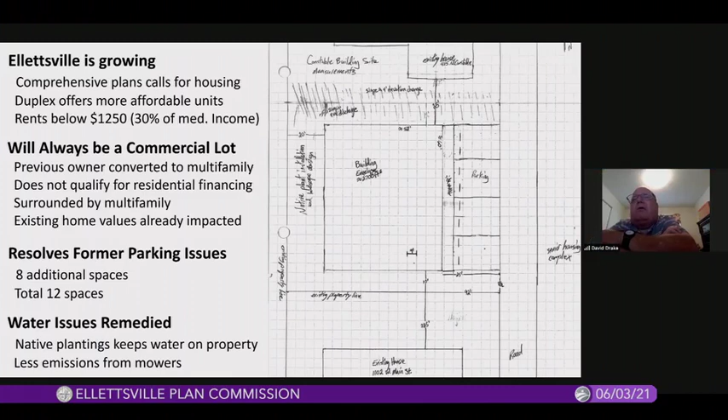Kevin, do we know? I don't have a question, but I went up there and looked at the area, and I gotta say, I know what's happening, but I do not like the mixture. There were single families living in homes mixed with what's wanting to be done here, and a mixture of older people living in there. It's just like a big mixed up community, and I just think it looks congested.

That's a fair point. I anticipate that as Ellettsville grows, those empty lots north of Constable on Grant, where it dead ends and there's 2 or 3 single family houses, I suspect, though I don't have the means to confirm this currently, those 5 acres north of Constable and even those single family homes will ultimately turn into multifamily, since that's what it's zoned for. And we know the population in Ellettsville continues to grow.

That doesn't address the immediate concern for sure, and I see what you're saying. Yeah, I mean, I see that. Honestly, I don't think that one duplex on a vacant lot is really going to affect things much one way or the other at this point.

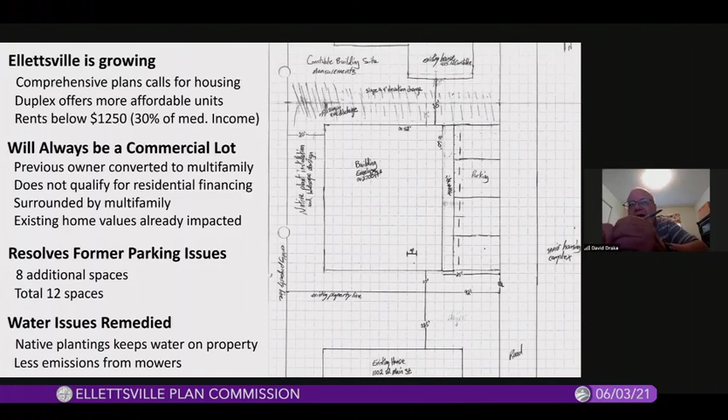Just my opinion. Kevin, do we know who's trying to get in? I don't know, and I don't see anyone trying to get in right now. Okay, I just wanted to make sure it wasn't someone who wanted to address this petition. But if they're not currently trying to get in, then there's not much we can do about it right at the moment.

So any other questions from the Plan Commission? Yeah, I've got a question, Terry Baker. Is R3 the only way we can go on this, or would R2 multifamily work for a duplex? Because R3 opens up so many doors.

No, it would have to be R3, because otherwise we get into splitting the lot, and if we do that, it's not going to meet the minimum lot size we have now. So then it would end up going through the Board of Zoning Appeals, which isn't... I mean, it was either this or going through the Board of Zoning Appeals. Plus, it brings the rest of that property into compliance. I mean, it's legal non-conforming, so it's not an issue, but going forward it would make it a little cleaner.

Thank you. I drove up there too. I've driven by it multiple times, and it's a one-way street, so it's pretty narrow. The lot, when you just look at it empty, looks so small and so close. I would really like to see a single family rental go in there rather than a duplex, but that's me.

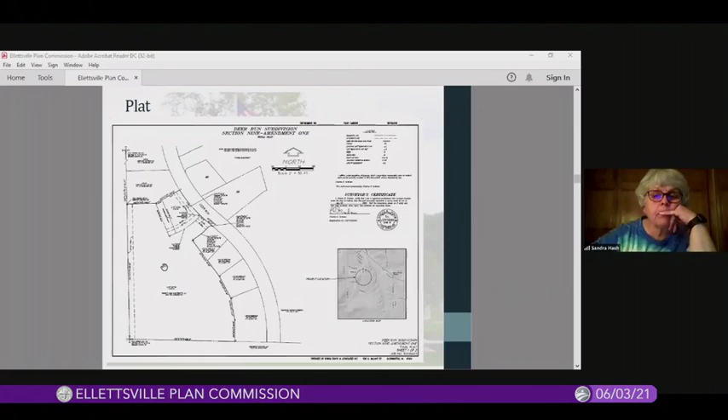Is that where they took all the trees out, Kevin? Probably, yeah, I'm pretty sure they took a bunch of stuff out. Whoever buys that home better have something with their driveway, because my Lord, they're so steep. It's unbelievable.

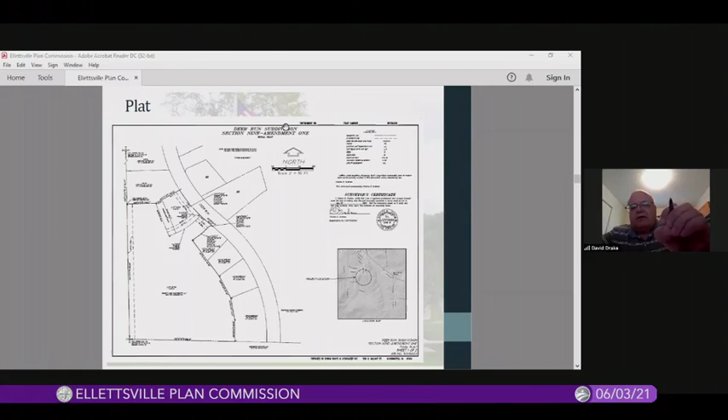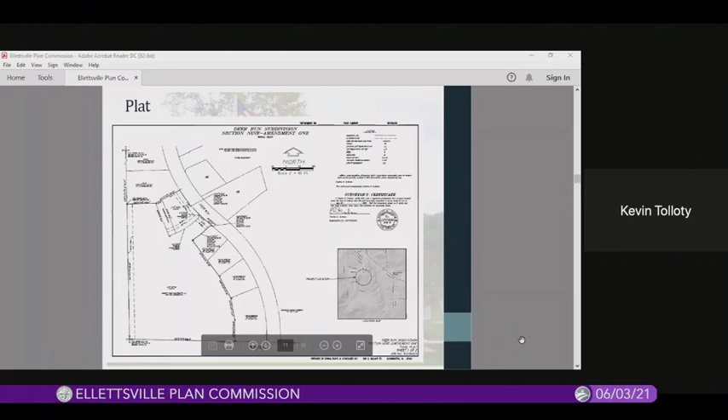Okay, did anyone from the Plan Commission have any questions or comments for Kevin? Kevin, is there anyone from the public showing up? Looking, I don't see any hands raised on the Zoom feature. I can only see 4 people at a time with my screen, so I do not believe there's anyone. Well, if there is anyone, unmute yourself and say hi quickly. Okay, I don't hear anybody.

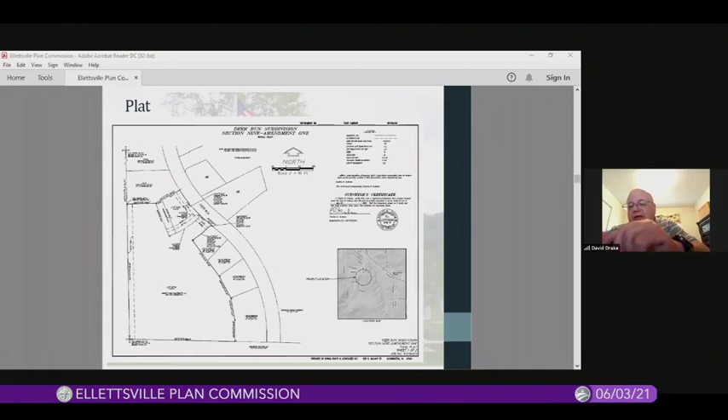So would someone like to make a motion? Boy, nobody's in a motion mood tonight, are they? So I will make a motion that we approve the final plat amendment for PC 21-15 in Deer Run. I'll second that.

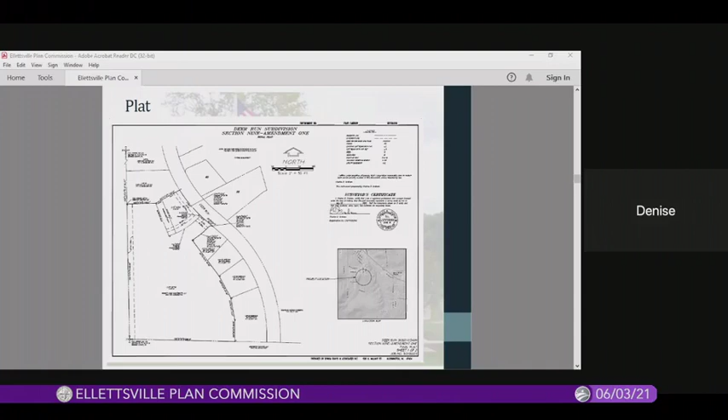Denise? David Drake, yes. Dan Swafford, yes. Terry Baker, yes. Don Calvert, yes. Sandra Hash, yes. Pamela Samples, yes. Pat Wesolowski, yes. Motion carried.

All right, thank you. Next item on the agenda is development plan approval for a multifamily structure, 56 units at 4252 North Tupelo Drive. The petitioner is Rubicon Property Group and it's case number PC 21-14.

All right, I can't see my name on here, I'm hoping I'm not muted. Nope, you're on, all right good deal. Okay, this case is for a development plan, not a development plat, for a 56-unit apartment building in the Cedar Bluff PUD. It's been reviewed by our tech review, which had no comments other than I asked for a tree to be relocated, so that went very smoothly. That's been updated on the landscape plan as well, so everything is good to go from a technical standpoint. It's been noticed by mail and in the Ellettsville Journal.

Just briefly, there are 11 criteria for the Planning Commission to look at: compatibility with surrounding land uses, compatibility with the comp plan, adequate provisions for internal traffic, analysis of the capacity of adjacent streets to handle additional traffic, adequate provisions for public facilities and infrastructure, on-site management of stormwater and erosion control, provisions for the allocation of land for streets, parks, schools, and other public and semi-public buildings and uses as appropriate, provision for green space and/or landscaping, provision for buffering from dissimilar developments, protection of existing limestone, and provision of pathways, trails, and/or sidewalks for all non-industrial developments.

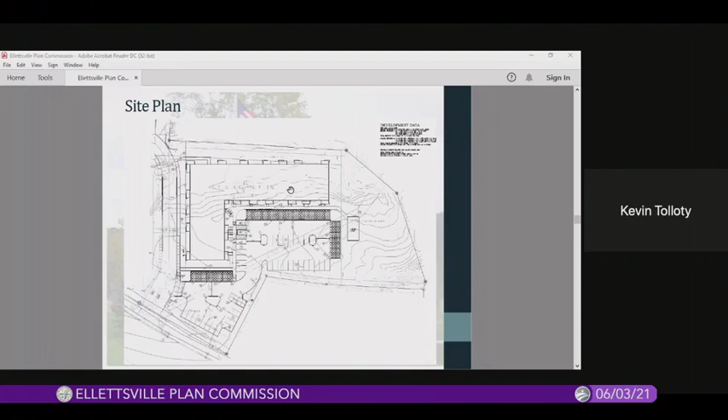And at this time I can take any questions. I also believe that the developer, Michael Eaton, is on the meeting and he can speak to this as well. Where is the water retention area on this map? Let me go back up a little bit. The pond is, so you have, this is where the apartments would be, then Starbucks to the west of that, and to the west of that is the drainage, the pond.

Did anybody else from the council have any questions for Kevin? Excuse me, this is Pat. How far will the apartments be from the houses in the back there that you're talking about?

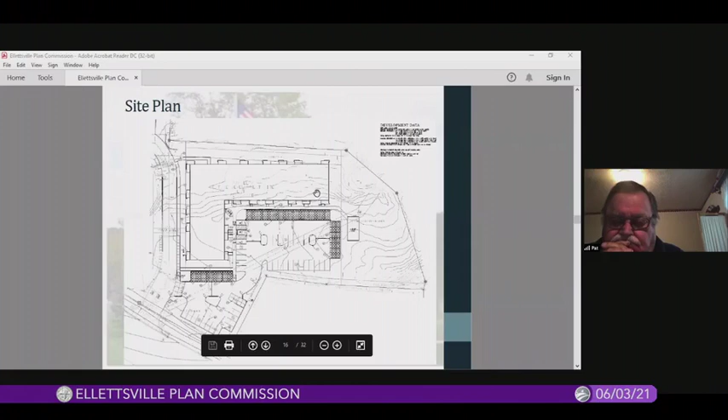There is a buffer. Let me look quickly on my plans. I don't know that off the top of my head. I want to say it's like a 25-foot buffer to the property line. I'm not sure how far back the houses sit in Spring Valley, but I would say it'll probably be, I want to say, 25 feet.

I'm assuming that all these are having balconies. Yes. How many stories is it? It is 3 stories.

Okay, any more questions for Kevin? How about questions for the developer? Or should we just let the developer present something for a couple of minutes and then see if we have questions? Good idea. Okay, would Mr. Eaton like to say anything?

Kevin, is he there? I saw his name earlier, yeah, I see it. And now yeah, he's on here, Kevin. Okay. Oh, yeah, I see him. You have to unmute him, or can he unmute himself?

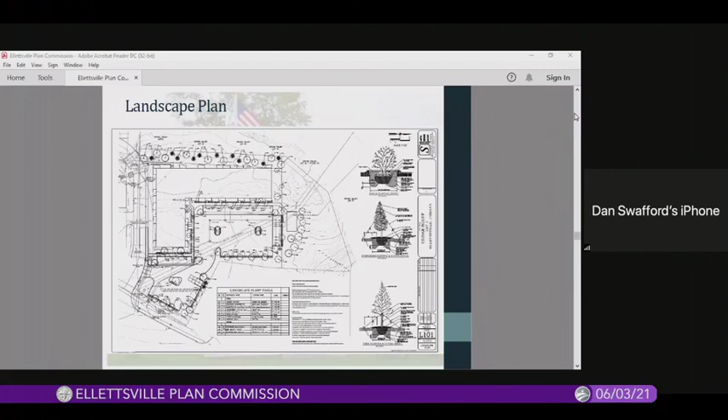Other than what has been mentioned for lot 3 in the current plan, no, unless you could go into the Conservancy or something like that. The parking still does hit the PUD requirements from the original planning approval. Right, and I think we had a concern about parking then too. And correct me if I'm wrong, but there was some garages that we counted in the original PUD. Wasn't that correct, Kevin? Garage spaces do count as parking spaces.

I'll just give a real quick refresher on development plans. The Plan Commission did approve the number of parking spaces, the parking calculations that are being used, and they are being met. And Darla, please correct me if I'm wrong, but I think we are obligated to approve things that do meet our codes, especially those that have been approved in the past 5-6 years. Yes, that is correct.

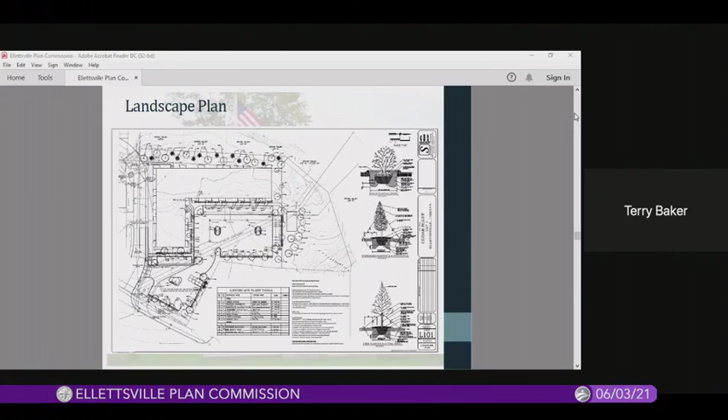But what was the PUD approved for? Was it approved for multi units, or was it for something else? It was approved for, the commercial portion was mixed use, which prior to being amended accounted for apartments over commercial. The PUD was amended this year to allow apartments on the first floor. It didn't really change the amount of units that you could physically put on a lot, though. The parking calculations were not changed.

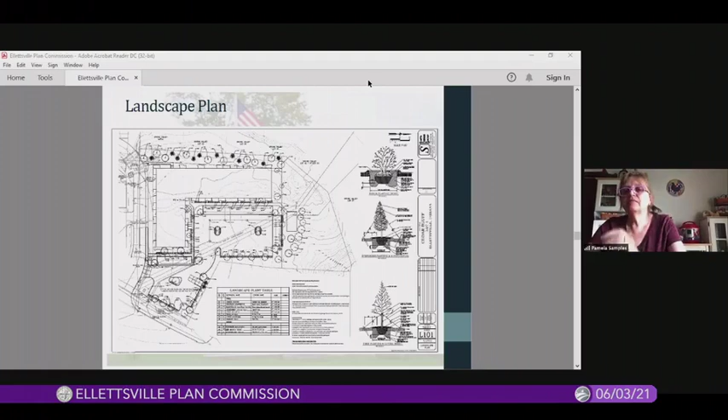Okay, does anybody have any more questions of Kevin or Mr. Eaton about this? I do for Kevin. Kevin, how is it with traffic, with that being like housing and then all those apartments?

That would have been approved by INDOT when they put the streets in. And I think, and this is something we'll probably hear about later, apartments are going to be a less intense driver of traffic than some commercial, such as Starbucks, which is right in front of it, or across from it, I guess. So from a traffic standpoint, this actually is not a bad use of the land.

Plus, they will have access to both Tupelo and Cypress once everything's completed. Will this complete the Cedar Bluff area?

Kevin or anybody? Well, we didn't hear what you said, Pat. I'm sorry, will this complete all the building in that area then? There'll be no more building? This lot, there's this lot and lot 3, which will be a multi-unit commercial building, and we already have approved the development plan for that. And maybe Mr. Eaton can speak to when that is planning on being constructed.

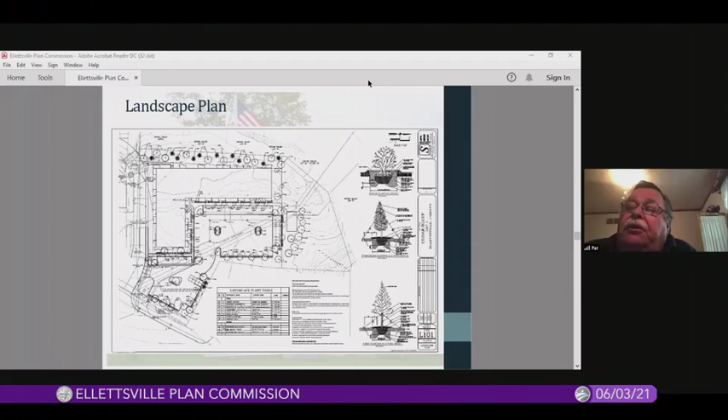And that'll complete it then, Kevin? Yes, those are this lot, the one we're looking at tonight, and the multi-unit commercial are the only lots that are undeveloped up there. Okay.

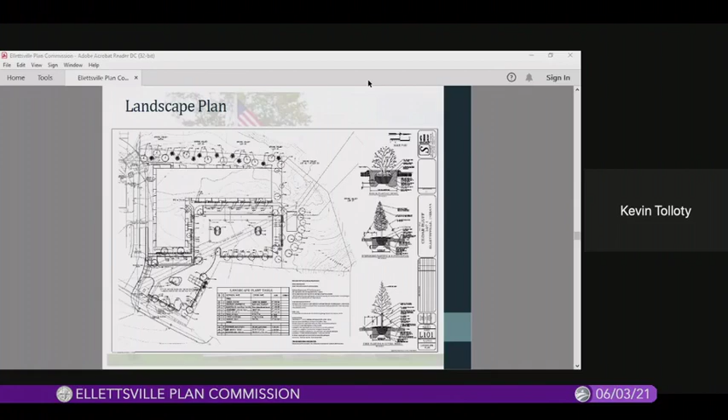The gentleman that's spoken, is he the builder or the developer? Yes, both. Did you do the townhouses and the apartments also? We did. Will this be as nice as that? Yes, if not a touch nicer. This is masonry and metal panel, so it's really going to enhance and be a really nice look for the community. I think it will nestle itself in there pretty well, and especially coming from the west, seeing it is going to be a very attractive building. Coming from the east, you're not going to see it so much.

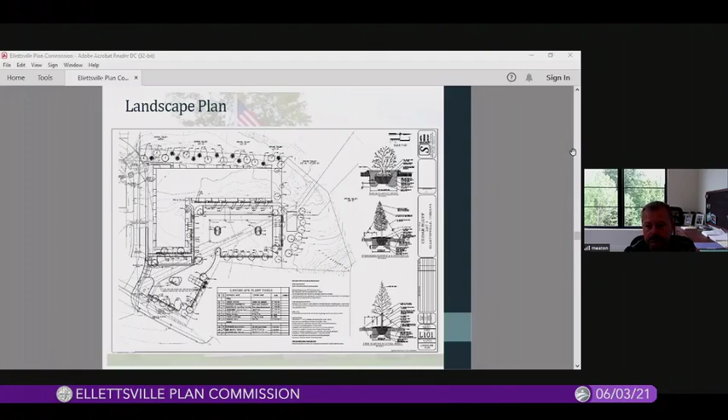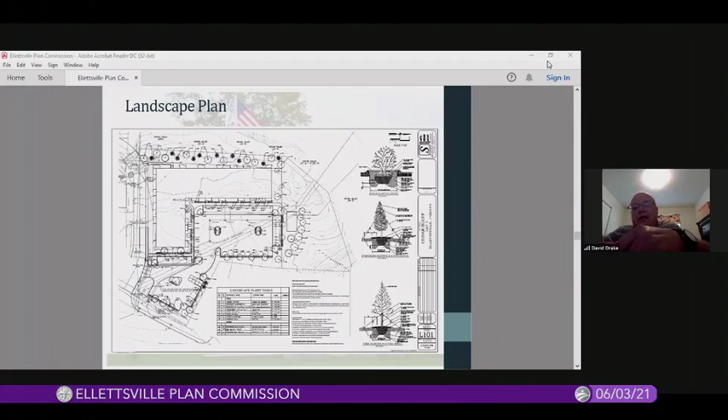Okay, any more questions from the Plan Commission? How about questions or comments from the public? See anybody, Kevin? I'm looking, and I am not seeing any. Oh, so I see someone waving their hand around.

Thomas Spoonmore, I believe. Hello? Hello. We can kind of hear you, yes. Oh, hi. My name is Linda Summers, and I am a resident in Spring Valley.

I live on Ashbrook, and this is the first time I have attended one of your meetings, and it's very interesting. I'm really impressed with your questions, particularly the traffic and the cars and making sure they have enough parking. So I don't really have a question, except that from what I've gathered, just listening to you, you don't have much input on what this is going to do to 46 with all of these developments going on. Is that correct?

Yes, if the State Highway Department says that it can handle the traffic, then we pretty much have to go with that. You pretty much have to go with that? Yes. Okay, so you can have an opinion about it. And if you think it's going to create too much traffic, even if there's enough room to put in more apartments, you have the authority to stop that? I'm not really quite sure I got that.

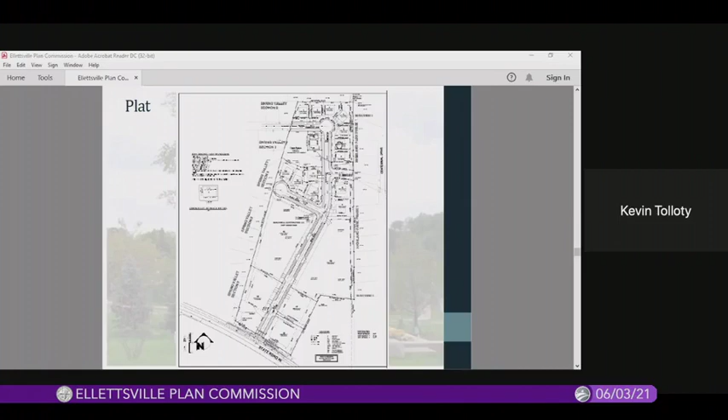Just an overview of the entire plat. The commercial lots are down here on the southern part. This middle part would be multifamily, and single family would wrap up around, then Spring Valley on Ashbrook. Just a close-up of the commercial lots, and those would be the multifamily, and this is most of the single family.

And just a couple pictures of the site. I mean, it's a lot of empty ground right now, 17 plus acres.

At this time, I would like to turn it over to the petitioner. I believe Katie Stein may want to speak, I'm not sure if anyone else with the project is here. Thank you, Kevin, yes, this is Katie Stein, can you guys hear me okay? I'm Katie Stein, I'm representing the petitioner, Kenny Blackwell. I'm with Smith Design Group, and we are the civil engineers and land surveyors for this development.

Kevin has done a good overview of this project. It is a 17.5 acre parcel, zoned C3, the highest intensity commercial zone within the Town of Ellettsville. We are proposing to subdivide this property into 20 lots. 14 will be single family lots on the north side, and we'll have 3 commercial lots on the south, adjacent to State Road 46. 2 lots in the middle are proposed, not with this petition, but proposed to be multifamily lots. And then we have 1 lot that is open area, common area, shown here on the screen.

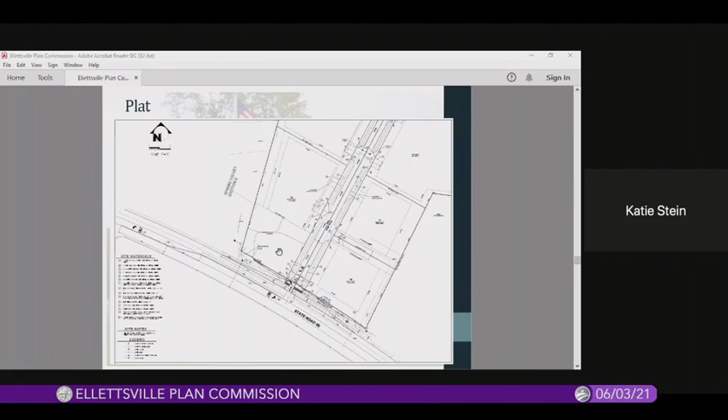Utilities that are going to go in, we will be extending public utilities. We will have sewer, water, electric, communications, possibly gas to serve this entire neighborhood. For stormwater, we will have stormwater inlets throughout, and 3 detention ponds proposed in this neighborhood. One will be right where Kevin's mouse is on this plan - there's an easement on that first commercial lot that will be one of the detention ponds serving this community. The other 2 will be up on the north end on the common area open space. This will provide water quality and also control the release rate of stormwater due to development from this site. So that is the end of my presentation.

I also have with me Kenny Blackwell, he is with Blackwell Contractors, they are the developers and owner of this lot. And we also have his legal counsel, Greg Lauer, here as well. We are open to questions at this time. Thank you. All right, thank you.

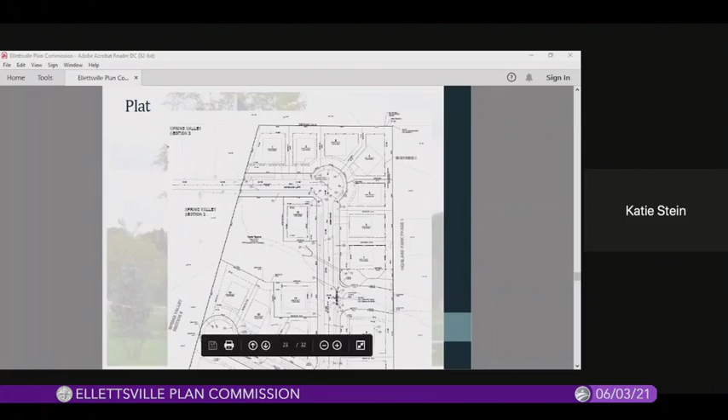Kevin, I have a question for you. I'm still a little bit confused about the 2 different approvals. So with the first one, PC 21-02, that does not include any apartments, is that correct? Correct, this approval would just subdivide the lots. Okay, now the apartments would not be permitted until the PUD or something else is approved, but yeah, this would just split the lot. I don't have an issue with this part of the proposal, but I have some real issues with putting 2 big apartment complex buildings up without the access to Centennial that I think we've got to have with that many new apartments. So does anybody have any questions for Kevin or the petitioner?

Where will be the entrance off of 46? Will it be closer to the stoplight, or close to Deer Run? Not Deer Run, but the other Deer. Where's the entrance going to be at? The state gave the okay for it to be right in the middle of the property. Yeah, the entrance onto State Road 46 will be at the middle of this property.

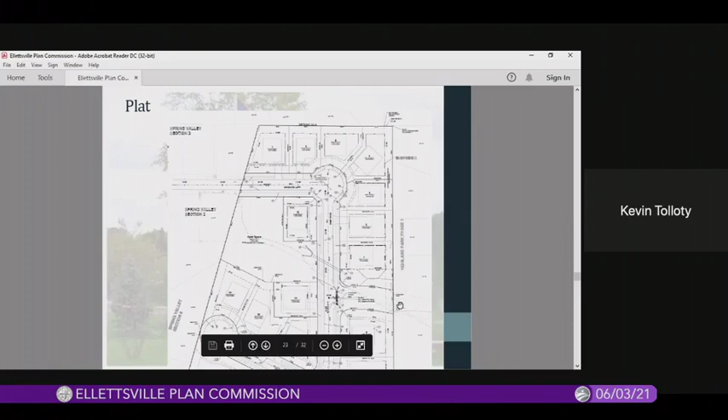Okay, thank you very much. Terry, I pulled it up real quick. I took the plans down so I could see the screen, but there is a stub right there that would connect directly to where there may or may not be a right of way.

Okay, thank you. So what the petitioner is telling us is that Kreider does own that lot? He claims he owns it. Careful, Kevin.

Okay, so at this point, it seems like that Centennial Drive connection is unclear. So does anybody have any other questions for the petitioner or for Kevin?

Real quick, David, could I add one thing? Katie, please correct me if I'm wrong, but I think we discussed that in approving the subdivision, you would like to have it phased where the first phase would only be for the single family lots, and the later phase would come hopefully with better access.

Did you? Who did you direct that question to? The petitioner. Yeah, I think the phasing may have been just discussed earlier, when we were still trying to figure out the whole access thing. But I believe now, confirming with the developer, this will be built out all in one phase. Is that right? Yes.

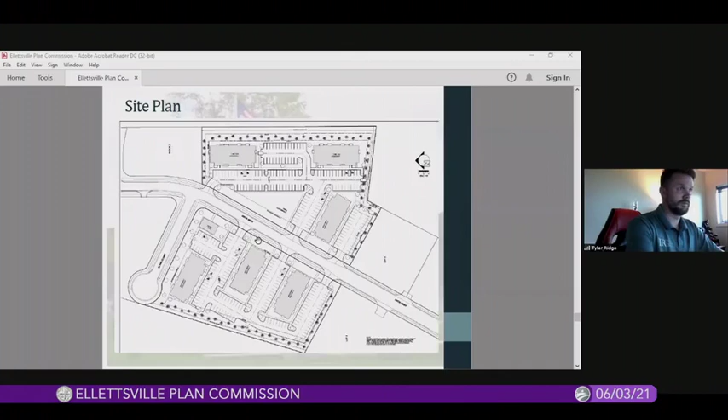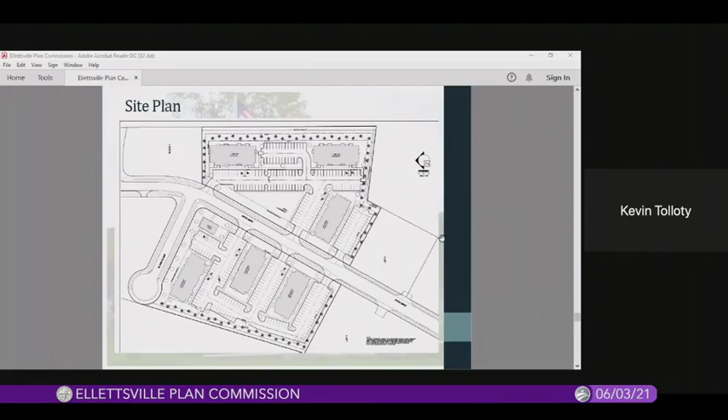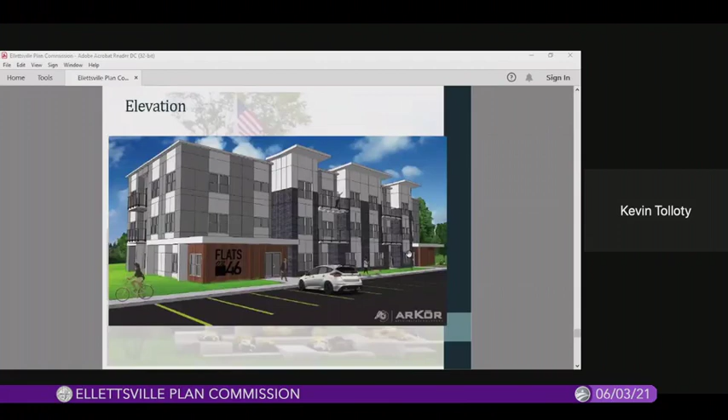This is the site plan, turned on its side. The left side here would be going out to 46. It would have 3 buildings on each side, and the triangular piece is a large common area—a community park. Let me rephrase that, I had it backwards: 46 is actually on the right-hand side, and it's shown better here. Here's that park, the triangular piece. A couple renderings of what the apartments would look like.

And that is all I have to say about this. I will turn this over to either Tyler Ridge or Katie Stein to talk more about the project.

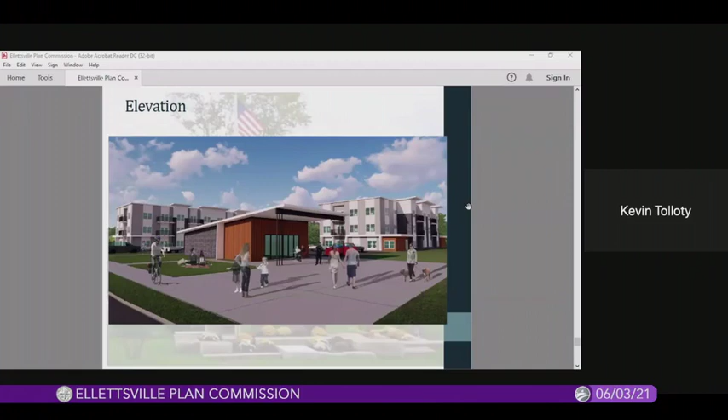Hi, Kevin. Can you hear me? Yes.

Plan Commission members, thank you for hearing us. My name's Lynn Coyne, an attorney with Bunger and Robertson, representing the Ridge Group. Our plan is I will give the context, Tyler Ridge will describe the project, and Katie Stein will talk about adjustments to the site plan made over the several months we've been at this. I appreciate your time and patience, I know it's running late, but I'd like to explain where we are given you just approved the subdivision.

As you know, there are two lots in the subdivision currently zoned C3, and that's what we're talking about. It's important to understand these lots remain zoned C3, the highest commercial classification Ellettsville has at the moment. So what that leads to is what could be done by right.

That is, what could someone go in and draw a permit for tomorrow on these lots? There's a broad range of things Kevin mentioned, and among those—I believe Kevin can confirm—is apartments over retail or commercial. Is that correct, Kevin? That is correct. That is permitted by right.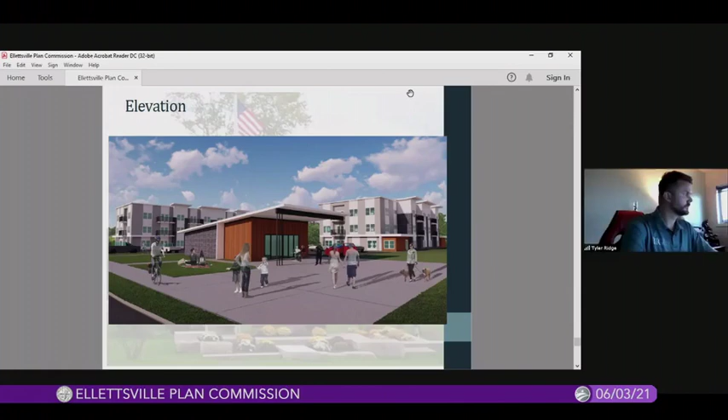Tyler touched on parking, but I want to mention the code requires 2 spaces per unit, and Tyler walked through the parking ratios we are proposing. As Tyler mentioned, 252 spaces would be required if this PUD is approved for the amount of units proposed, but our site plan shows 293 — 41 additional spaces than what would be required.

So the other thing we wanted to address from the neighborhood meeting was the buffer yards. We had a conceptual plan with some trees just showing there was a buffer yard, so we went through and made that plan more realistic of what that buffer yard would be. The town does require a buffer yard; however, there are no standards in the town code as to what that buffer yard needs to be.

The standards come from being similar to what the Cedar Bluff PUD was approved at for their multifamily area that is adjacent to single family residential. So we have a mix of evergreen and deciduous trees, spaced 20 feet along all of the property lines that are shared with single family lots.

The PUD will also require that preservation of existing trees extend to the greatest extent possible, so we will try to save the trees. Those trees that are saved will not be counted towards the buffer yard trees, so the buffer yard trees will be new trees, new plantings.

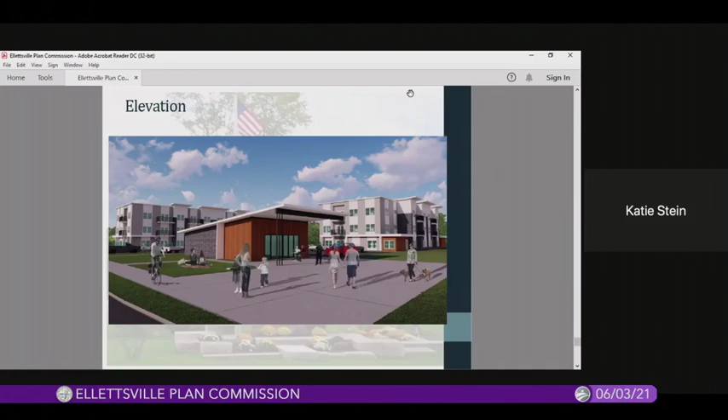There is quite an extensive landscape plan for the interior aspect of this project. The standards set are similar to what you'd find in the City of Bloomington's requirements, including interior plantings, parking lot perimeter plantings, and foundation perimeter plantings, all a mix of deciduous and evergreen shrubs and tall and medium canopy trees.

We didn't go out for a full landscape plan at this stage, so the interior parking landscape has not been fully planned out. That is what has changed with the site plan since this was originally submitted to the planning department. And that wraps up my presentation.

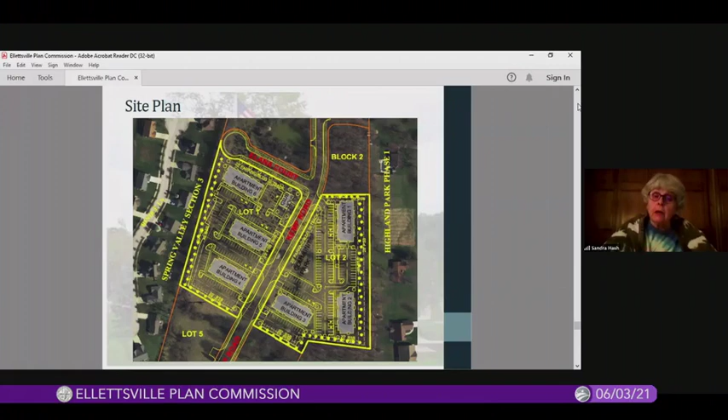I appreciate that you are less congested than a full-blown commercial facility, but it still is a lot of problems for Highway 46 and for this neighborhood who may get overcome with these vehicles. So my question is, does the INDOT permit as it stands now limit the number of cars coming in and out, or can you put all of this in there and just make it a right-hand turn out and it'll all be fine?

Well, yes, to answer your question, INDOT's report took our apartments sized as you see into consideration when limiting the access on 46. And Ms. Hash, I absolutely understand what you're saying. But as it stands today, with the right in, right out, on a weekday, the numbers I said would generate over 3,000 24-hour weekday trips. With ours, there's a 70% reduction in that. Now, if someone comes in besides us and buys these two lots and wants to put apartments over retail or commercial or one of those many uses, I'll defer to Darla, but I do not think at that point you can say to them, well, we won't let you use it for what it's zoned unless you do something about the traffic. I'll defer to Darla on that one. But that's the difference. If someone came in to buy a lot and said, I'm going to build whatever I'm allowed, that's different than what we're saying. We're already reducing the parking. So I'll stop on that, and I'm sorry.

Kevin, this is Pat. The right in and right out - the right in is the people coming home from work, they're coming from the east. The right out is when they go to work. Where are they going to turn around at to go east? Has that been figured out? These 900 cars that you're going to add on, if it's 900 or 9,000, whatever it is, where are these people going to turn around to go to Bloomington? Can somebody explain that to me?

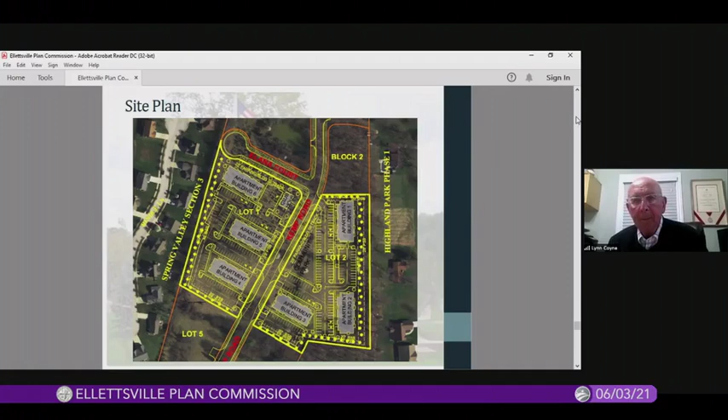One of our dilemmas we face here is that State Road 46, it is by its name, a state road, and that is under the control of INDOT. They do all this analysis when they talk about allowing us a right in, right out, or anybody access to State Road 46. That's within their control. And one would like to think they consider these issues, but it's INDOT and the state road that answers that question. We've actually told Kevin we would be happy to contribute towards paying for a light, but again, it's none of our decision. It's INDOT. Kevin may know, but I believe it's INDOT, and I believe a study was done, and I don't think Deer Park warrants a traffic light at this time. Or was a study done, Kevin? I can't remember how that ended up happening. I am not aware that another study was done regarding putting a traffic light at Deer Park. I know it's been discussed, but I don't know that there was another study done, or if there was, I'm not aware of it.

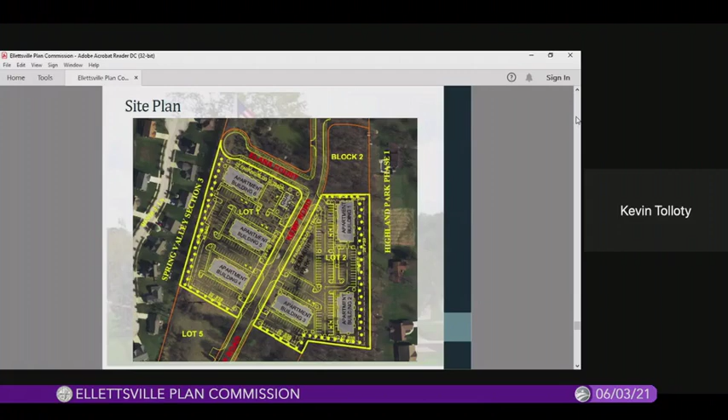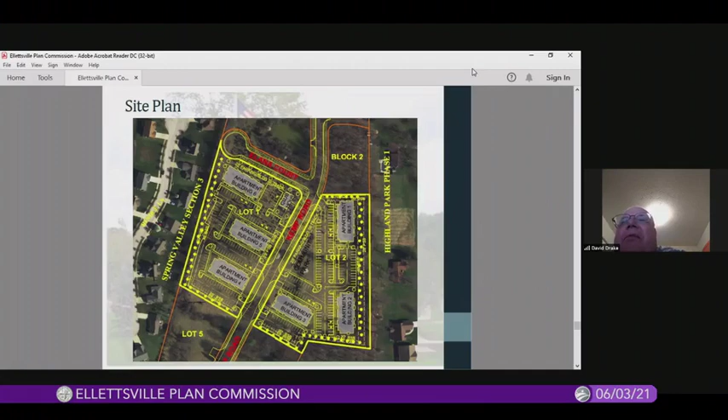Okay, did anybody from the council have any more questions for Kevin or the petitioner? Hearing none, do we want to open it up for public comment again, keeping in mind that we already heard about all the traffic, and have that in our minds.

My phone just... Hello, this is Tom Spoonamore. I'd like to say something. Okay, I'm sorry, are we open for this? Yes. Okay, well, I'm on the phone. I had to get offline because my speaker wasn't working correctly.

All I have to say is everything out here, it seems like it's all about the dollar and not the safety of the people in the neighborhood, and they really don't care about the neighborhood. We know what's going to happen if you guys do this, especially those at Ashbrook up. There is way too much traffic. 46 - I lived here when there were 2 lanes here, and now there's 3 lanes, and there is a lot of traffic going down this highway. And I know you heard a lot about traffic, but again, I think it's about the dollar, and it's not about the safety of the people or the neighborhood. Thank you. Thank you.

Kevin, anybody else? All right, got a few hands raised. First on my list is Brian Thomas.

Thanks, and appreciate the continued discussion. Like you mentioned, I live on Rendell Lane and definitely have concerns. This apartment building will be right in my backyard, 3 stories looking in, and in my lifetime the trees probably won't be big enough to ever have privacy. So immediately that goes to one of the tenets you all were looking at and charged with protecting, and that's property values. I know I would not buy a home with a 3-story apartment building behind me, and I have to think that's going to affect our entire neighborhood.